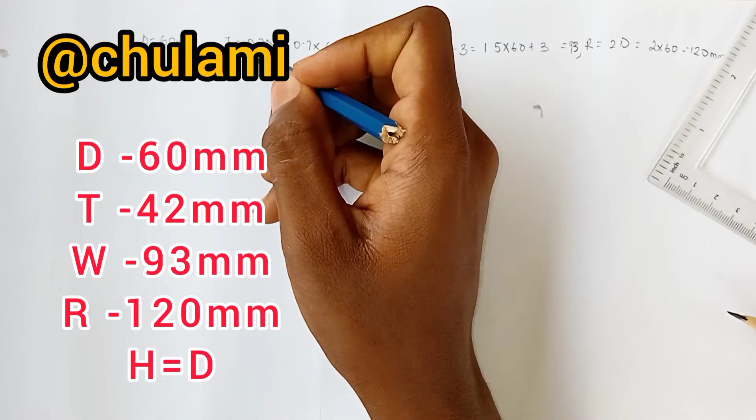So, in drawing a hexagonal nut, we'll need these parameters. So you can see our parameters given here. We have our d to be equal to 60 millimeter, our thickness, which is 0.7d, gives us 42 millimeter, our width 1.5d plus 3, which gives us 93 millimeter, and our radius 2d, which gives us 120 millimeter. So with these parameters we can draw our hexagonal nut.

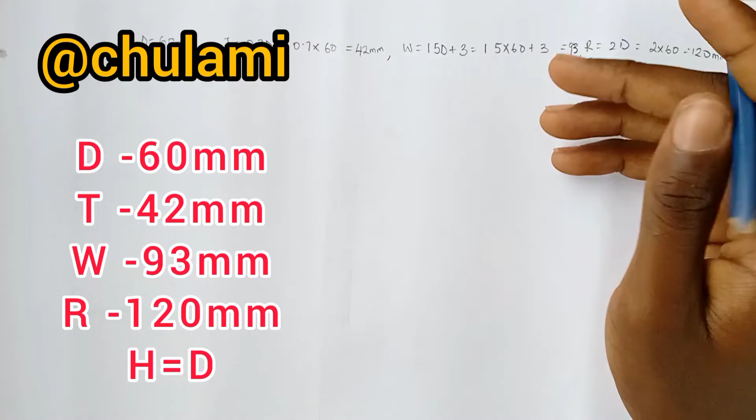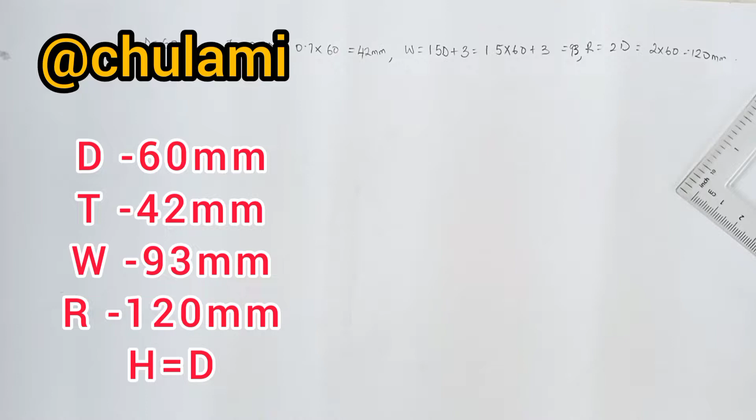And please mind, H here is what we call the height of the nut. H will be equal to d. Okay, so the height of the nut will be equal to the diameter of this given drawing. So the first thing is that we are drawing this diagram in first angle projection. Okay, so we are going to start with drawing the plan.

Now in drawing the plan, we are going to use the measurement of 2d to draw the plan. What do I mean? 2d is 120 millimeters, so with our compass the diameter of the circle we want to draw now is 120. But if the diameter is 120, that means the radius will be 60, and this is 60. Just watch, you understand what I'm doing. We want to draw the hexagon, so I point here and construct 60.

Okay, now after doing this, we are dividing this circle into four equal parts, and then we'll construct our hexagon. So I've divided our circle into four equal parts. Now I didn't shake my compass. With the same radius of the circle, I want to construct a hexagon. Cut up, cut down, put here, you cut up and you cut down. Now we'll join these points. Okay, so this is our hexagon.

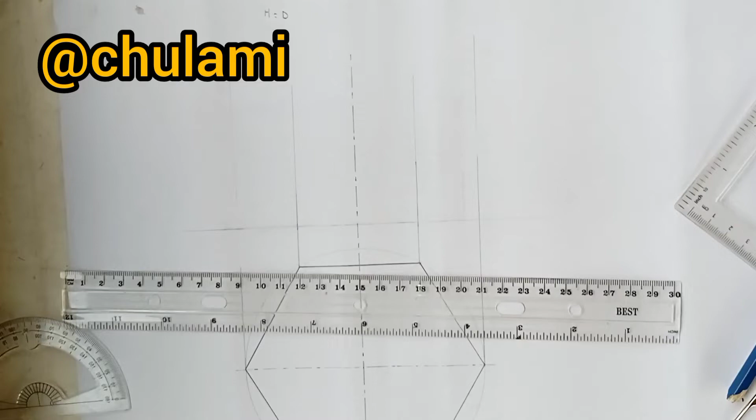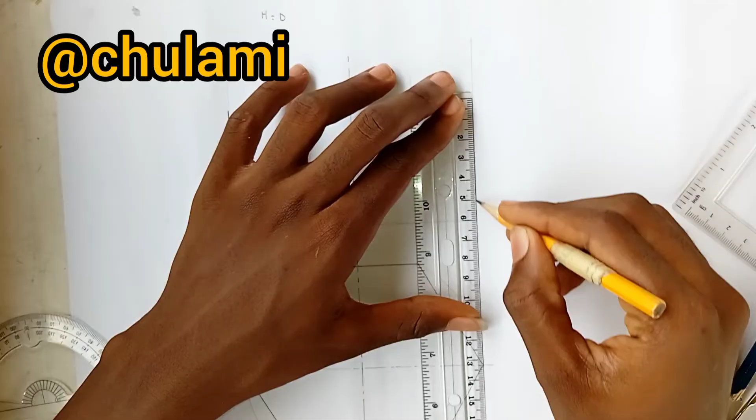Now we want to draw the height of the nut, so we take height to be equal to d, which is equal to 60 mm. So I measure 60. This is 60. Work must be very neat. Make sure your work is as neat as possible. And I measure 60 here too. And then I join. Okay, so that's it. Now we want to draw our arc.

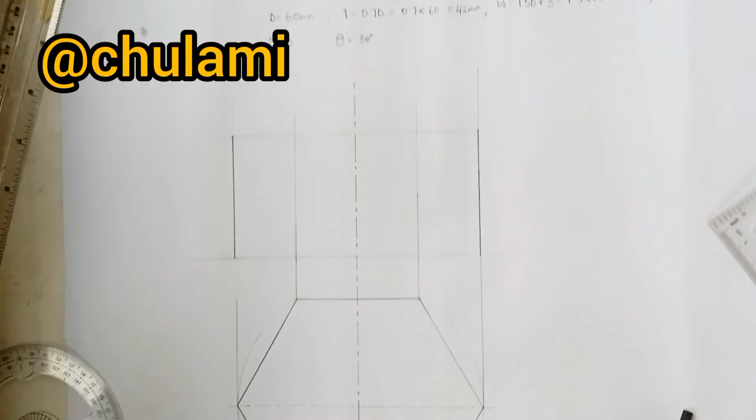There's one parameter that is missing. Our angle of chamfer was given as 30 degrees. Now I'll show you a shortcut on how to bypass this, but your drawing will still come out accurate and you'll still follow that 30 degrees. Now watch this carefully. With our radius, which was given to be 120 millimeter, we'll measure 120. This is 120, and then now watch this. So this is the point. Just measure it.

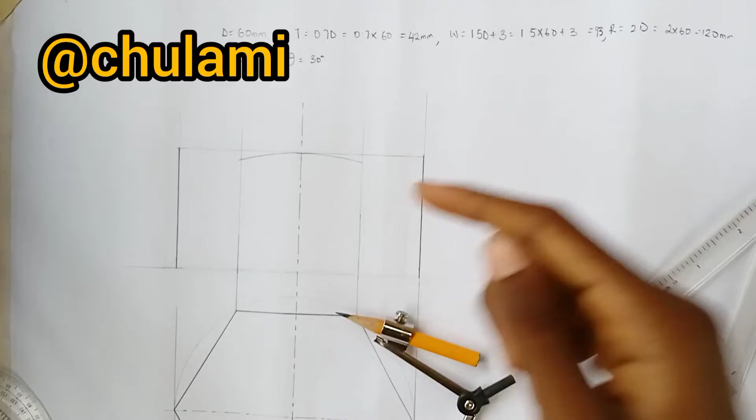Now I've drawn the arc. Now we want to draw the arcs for these other two parts. This is what I will do. I will divide this line into two equal parts, and then I will elongate the line. What do I mean? The measurement of this line here happens to be 3. So half is 1.5 and 1.5. So measure 1.5 by 1.5, which is half.

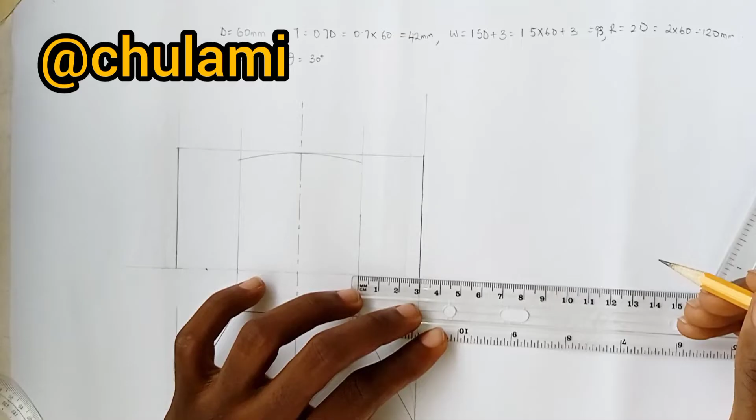Now we elongate all these lines too. Mind you, please make these lines as faint as possible because we are still going to erase them when we are done with our diagram.

You might not see the line, but it's kind of faint. Now watch this. At this point here, okay, this point here, you draw a faint line too to cut across this center line. Okay, so draw a faint line. I've drawn this line. Now I'm going to bisect this line to get our midpoint.

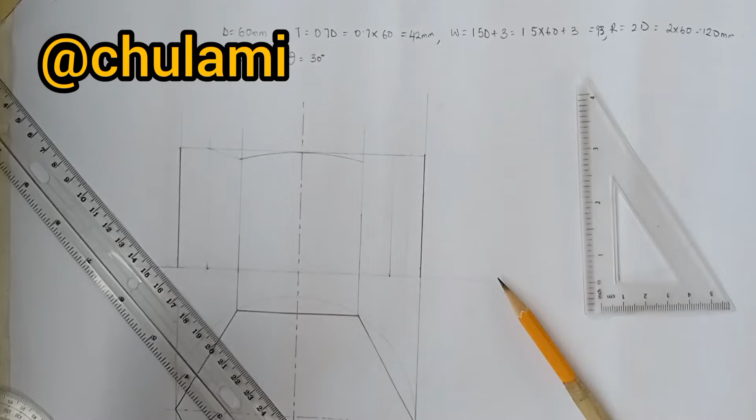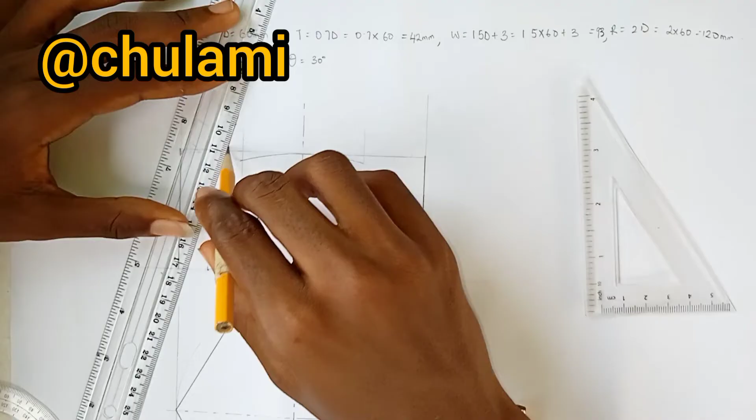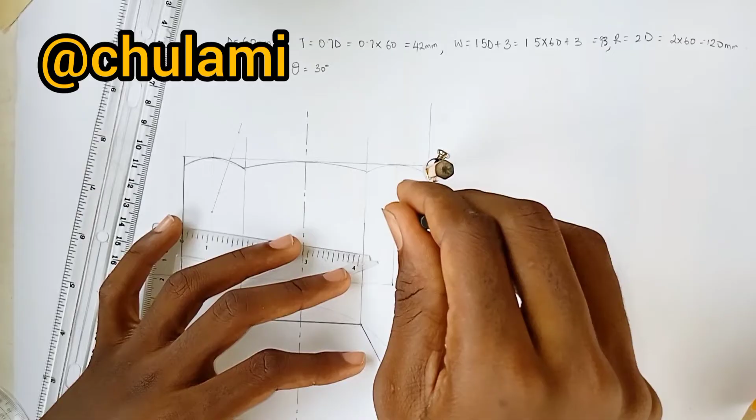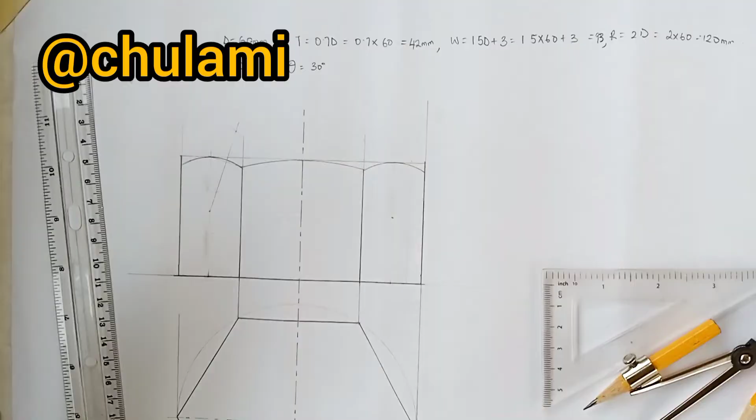Now before we get to the side view, we must elongate all our lines, okay, elongate them towards the side, and go from the plan, from the elevation, elongate them all towards the side view. I would advise you use a very thin lead pencil for your elongation lines. It's better to make you not be that confused when you're drawing. So let's start our elongation. Bring that up.

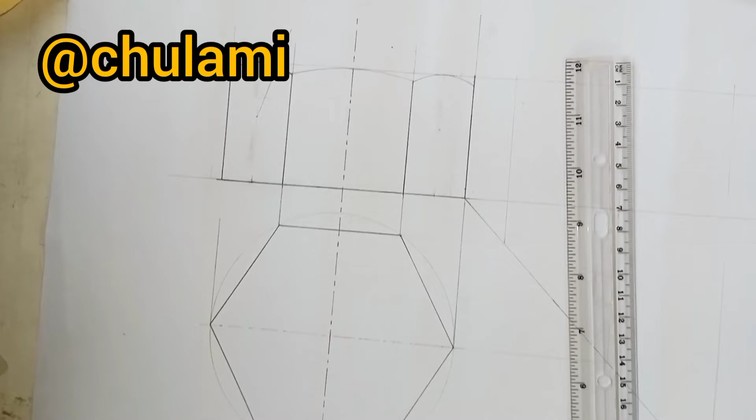Let's go straight to the side elevation. Now, at our side elevation, now we have this. Okay, remaining this.

Now we will still want to draw these curves at this part of our diagram. And remember how we did the previous one. Now this is what we're going to do for this. At the end of this curve, like this part of the curve, just elongate the line a little towards this part. You have something, make the line very, very faint, okay? And we have this. Now we're dividing this line into two equal parts.

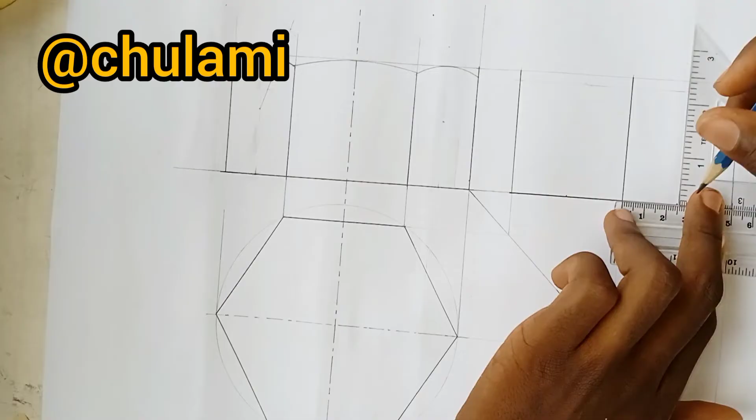So we have here to be 5, this 2.5 towards this area. Then we have here to be 5, 2.5 towards this area. Okay, so I just draw a straight line, very straight and faint. Now same thing. We join these 2 points, and then with my compass I pin it here, cut an arc up, cut an arc down. I also pin it here, cut an arc up and cut an arc down. Okay, then I'll join our points.

Now if you check, the line exceeded our diagram. Okay, so since it's exceeded it, we have to elongate this center line down to where they meet, to our point of pivot, and then we put it here, and then we'll draw the arc. Okay, so I've done that. Now to do the second one, instead of me wasting much time, I can just elongate this line first so we can get our point. Elongate, and then from this point here, point of intersection, we just hit the point here.

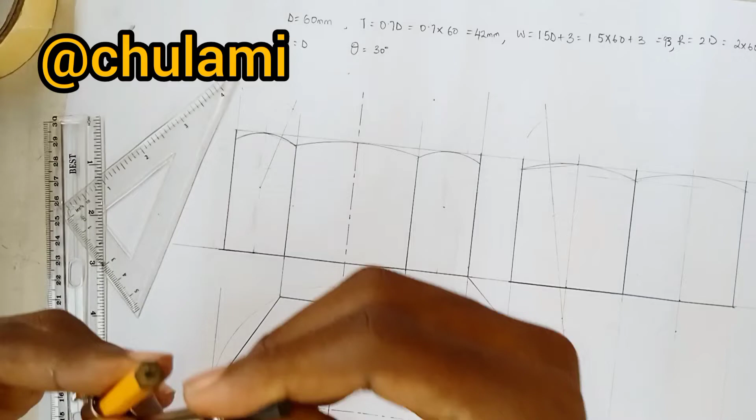Okay, so I've done that. So guys, this is it. Now we're given our diameter to be 60 millimeters. So if diameter is 60, the radius already should be 30. So we put 30 here. Okay, and then we'll come to this hexagon, and then we'll draw a circle.

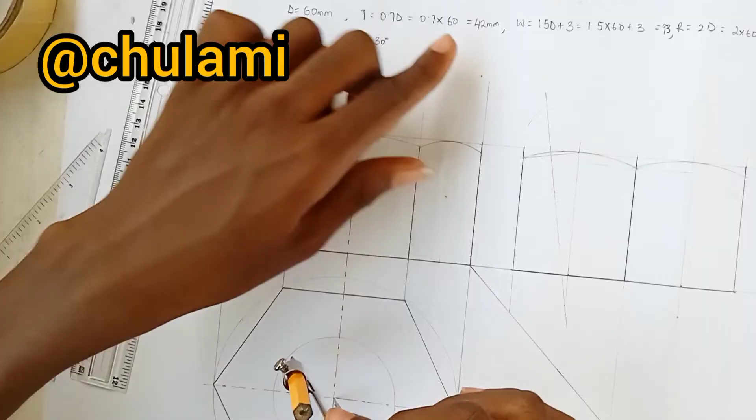And then we have our thickness to be 42 millimeters. So 42 divided by 2 is 21. So measure 21 here. Okay, so it's 21. I draw. Alright guys, this is it. So elongate this line and then draw broken lines on this part of our diagram. Now this is what I mean.

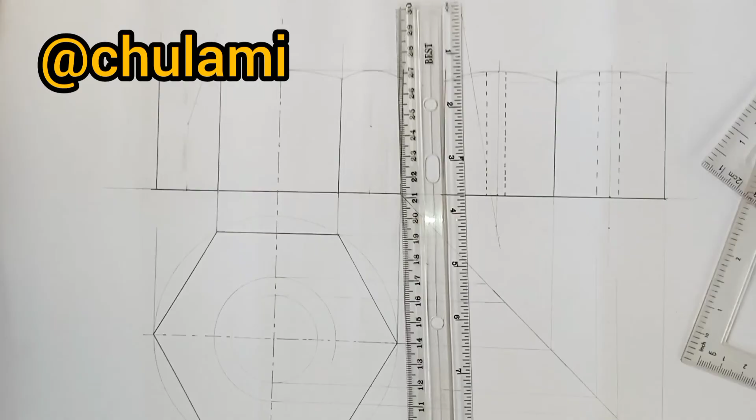So guys, we are done. This is our hexagonal nut. Wow, that was wonderful. Learning how to draw a hexagonal headed nut.